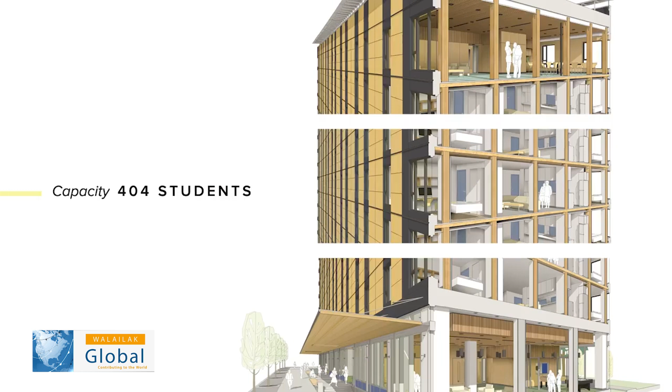One very good example is a building that was built, an 18-story building, built as a hybrid combination of mass timber as well as reinforced concrete. At that time when it was built - 2017, I believe - it was the tallest modern timber building in the world. It was built as a student dormitory with 400 beds for students.

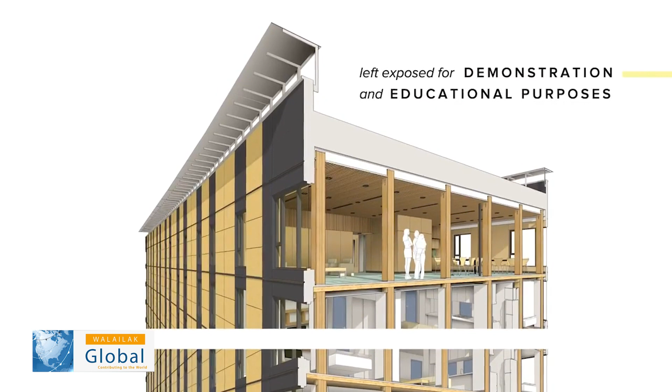So you can imagine the extra safety and consideration that have to be put together in order to have something like that built. And the university, although the push and the will is to try new things, the very strong point is that they do not want to spend extra money compared to a normal way of building. Of course, this cannot be done easily with new construction ideas. So in doing so, we had the government come in and say they're going to help support some of the issues in order to clarify how to build these types of buildings.

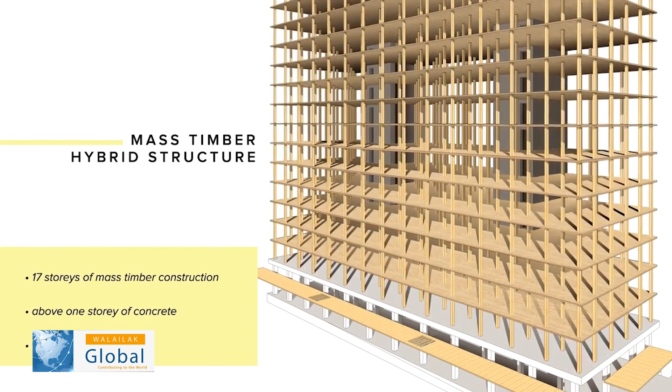There was a competition held in Canada, and they supported 3 projects, one of which is this University of British Columbia project. At the end, I think the cost was about 10%, less than 10% over that of reinforced concrete, but it was doable and reachable. Of course, this is the first time this type of building has been built in the world, so you have to pay a bit extra.

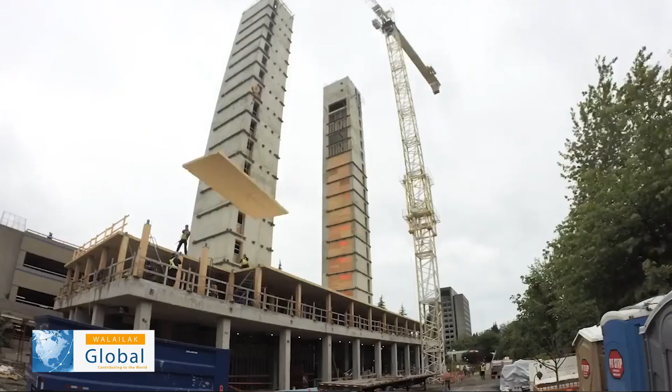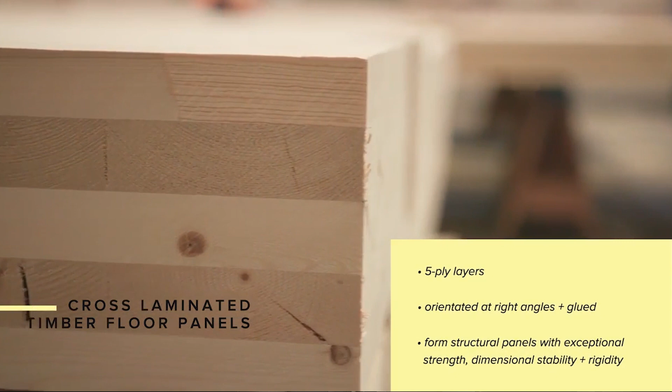At that time when the building was built, the building code did not allow buildings of such height to be built with wood, primarily due to fire concerns and also some issues that needed to be solved in terms of seismic resistance. Both of these have been dealt with successfully through extra research work and technical evidence provided to support such building structure.

It's quite extraordinary to use wood to build such a tall building, an 18-story building at the University of British Columbia, and also to house students. So did you say 400 students live there? That's a huge building. Was it the first in Canada to venture into this?

Well, first in the world. And that is part of your research, really, and you have people like Professor Lee to be part of that. Would you like to add more to that, please?

This building serves as a catalyst for many other similar buildings being built around the world. For example, currently the tallest modern timber building is in Milwaukee in the United States, but it used exactly the same structural system. The gravity load system is mostly carried by engineered wood products, and the lateral loading is a concrete core system. So it's a good example of using two types of construction materials to meet the building code requirement.

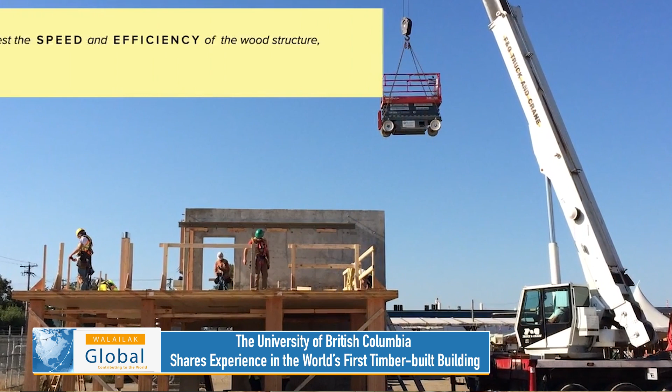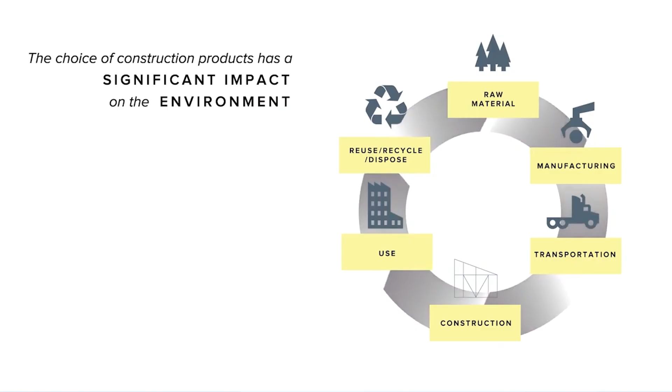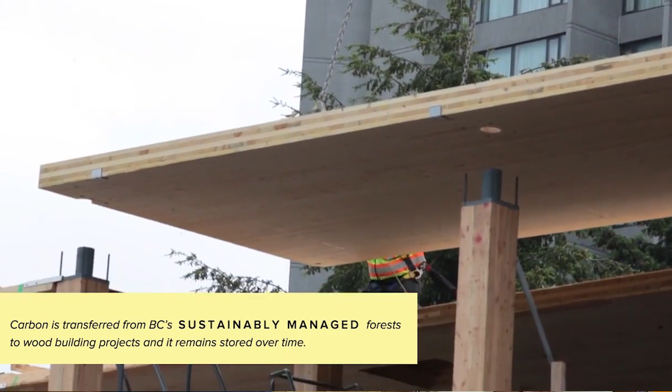I also want to echo Professor Lam's point on the sustainability aspect of using more mass timber for building construction. As you know, the Canadian government has set a climate change target—by 2050 the government wants Canada to achieve neutral carbon, zero carbon emission. This is a really important target to slow down global warming and tackle climate change. For UBC, the university itself has set an even more ambitious goal to achieve net zero emission by 2035.

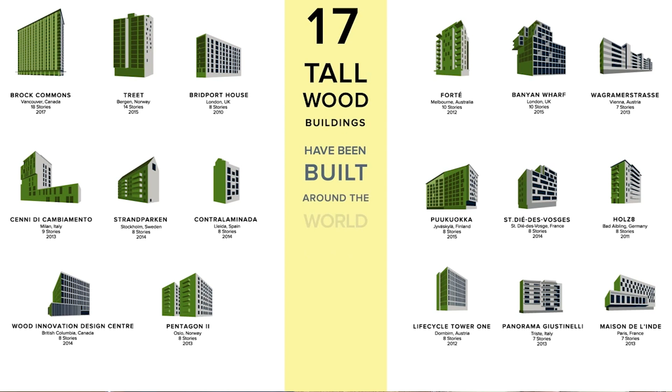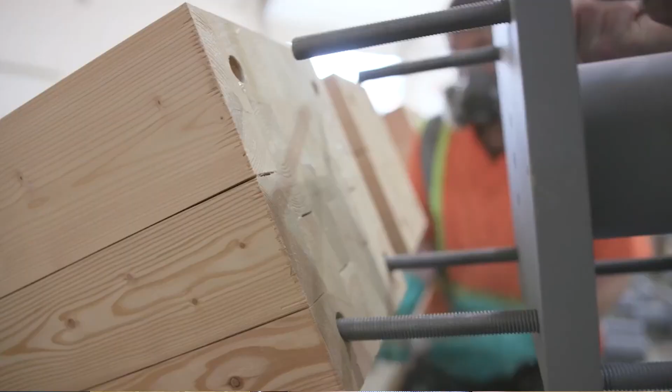So one option or solution is to use the lab as a living lab to demonstrate sustainability activities on campus and to use more sustainable construction material. One good example is to use sustainable timber products—sustainable timber products, that's the key there.

Now, in the case of Thailand, you've come here, you have Thai professors and researchers who are part of your research scheme. Can you comment on the progress, if I may? I'm not sure whether it's fair to the Thai researchers, but are we advanced enough in terms of research on using wood for industrial and commercial use in the way it's being done in Canada?

I think you're at the beginning stage, where at this moment your university is doing research on how to make this type of wood products. Of course, there are challenges with the resources you're working with—rubber wood as well as the oil palm tree resource has its own particular characteristics that need to be studied carefully in order to create this type of products for the marketplace. So you're making very important breakthroughs, in my opinion, because you have the resource here.

And you know best how to use the characteristics of this resource. The challenge, of course, is to convert that into a commercial wood product. So in that sense, there's a need to convince the industry, the government, etc.—not to buy into the idea, but really adopt it—that it can be done, not only good for the environment, but also good for a business solution, right? It has to be able to have a commercial value. The dollar sign has to be there.

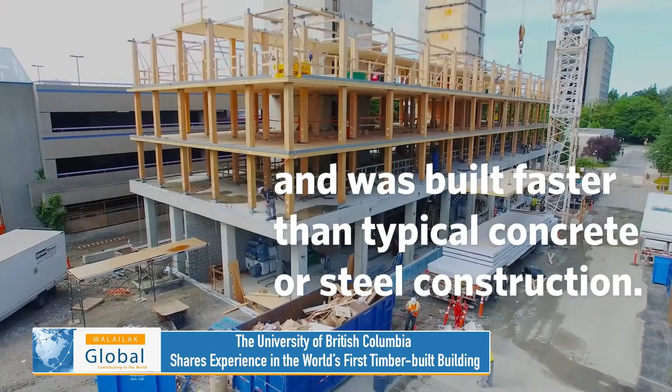The concept is that when we take the carbon from this natural material and turn it into structural wood product, we are storing the carbon in the building, and for the life of the building, the carbon is being banked. At the same time, processing this material into structural wood product, compared to reinforced concrete and steel, has a much lower carbon footprint and energy footprint. So there are two advantages: one is carbon storage, the other is the processing advantage of this type of material.

Of course, the challenge is to document all this, provide the technical information to support it, and the other end is to convince the builders and producers that there's commercial viability in the process.

That point is very interesting, because participation from the private sector in this sort of venture is quite crucial to make it possible in terms of the utility of the wood products that we have here. What would be your, I mean, you have been successful in Canada. We have just begun in Thailand. And the participation with the private sector is important to the very successful implementation of this sort of thing. What would you say about the role of the private sector? Where would you suggest to unlock, if I may say, that kind of block?

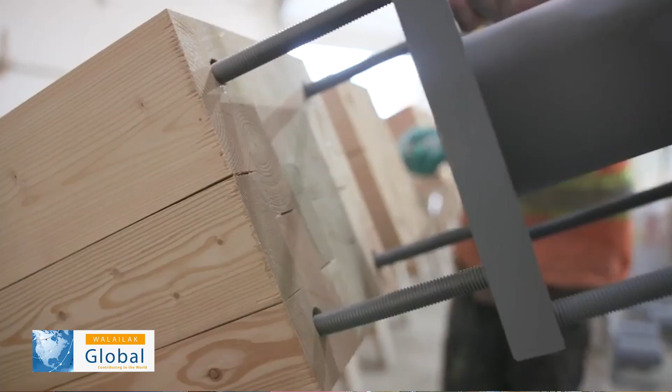And it's interesting that the center that Professor Lee is at is Sustainable Timber Built Environment, and your center is Wood Building Design and Construction. Are these research centers multidisciplinary? Because you were talking about producing engineers and architects. Yes, we are working in the same department, and currently Professor Lam is leading a Sustainable Timber Built Environment cluster. It's a research and education cluster. In total, we have 5 professors. We have different backgrounds. We have structural engineers. We have fire engineers. We have building sustainability engineers.

So we are working together on different aspects related to timber building construction. A fire engineer, interesting. And of course, we have colleagues on campus from the architecture department, structural engineering, civil engineering department, all really working towards expanding the use of wood as a sustainable, green building material, to create solutions good for the environment, good for citizens around the world, and safe, economical structures. This research must by nature be multidisciplinary, and it's interesting to have even a fire engineer part of it, probably one of the most important aspects to make sure buildings are fire resistant.